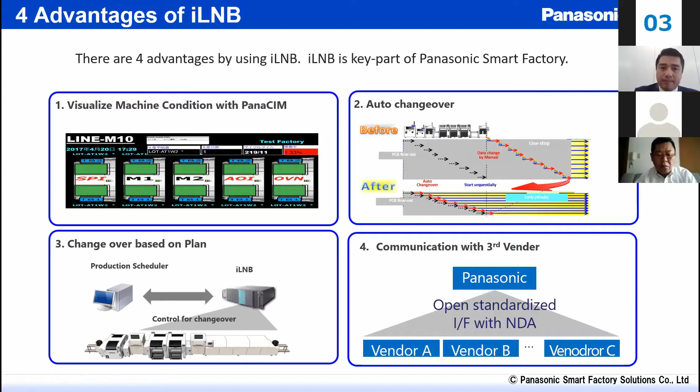I would like to introduce our partners for ILNB. As I explained, ILNB can communicate with third vendor machines. Panasonic already made NDA contracts and developed with these partners for ILNB. If you'd like to add your supplier to the list, please don't hesitate to contact us. We would like to expand our alliance as big as possible.

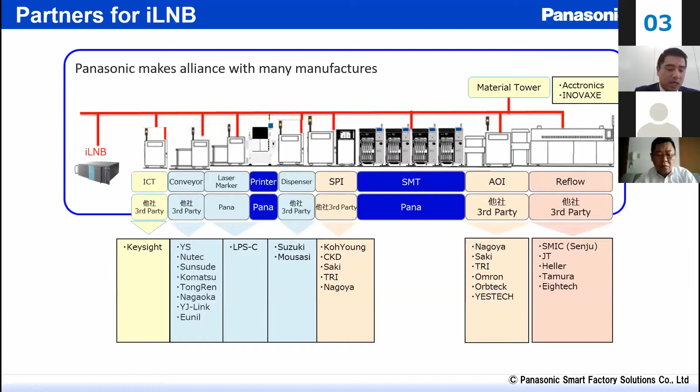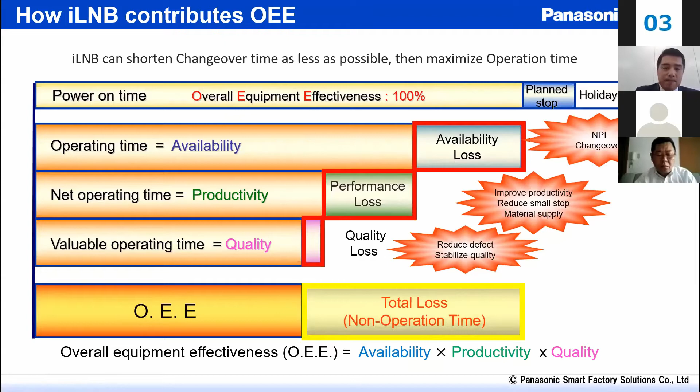In terms of OEE, ILNB can contribute to reducing availability loss. You can extend operation time as long as possible and maximize utilization of SMT by using Panasonic SMT machines with ILNB. Okay, let me move on to NPM-DX.

NPM-DX is the successor of NPMW2. Panasonic developed this machine for any-mix, any-volume customers. The most advantage of WX is its flexibility. Before I explain the details, let me show the general basic specifications. Width and depth are slightly bigger than W2, but CPH, accuracy, and the number of feeders are improved.

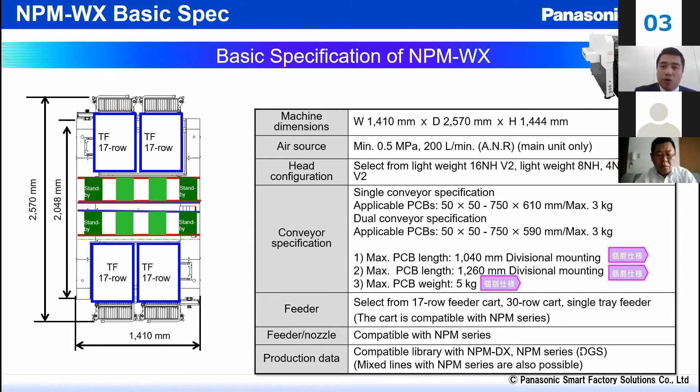Of course, nozzles and feeders are compatible with other NPM series, meaning you can use existing nozzles and feeders for the new NPM-DX. Before the detailed explanation, I would like to share a movie to understand what NPM-DX is more easily.

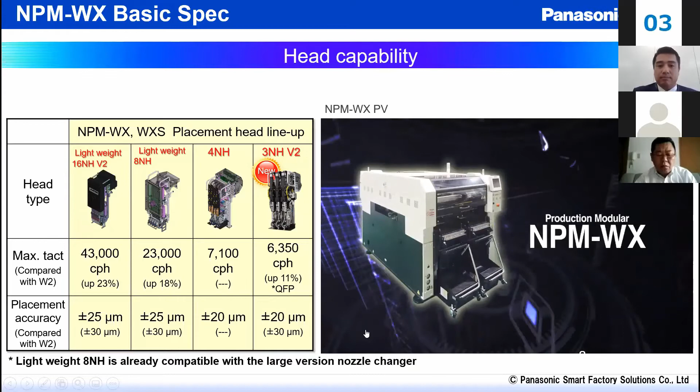Okay, this is the outlook of NPM-DX. NPM-DX is a one-stage, two-head machine, and it can pick and place in two-position placement, like you see in the movie right now.

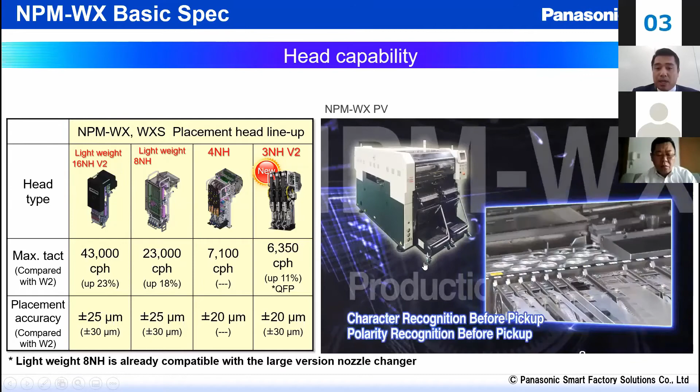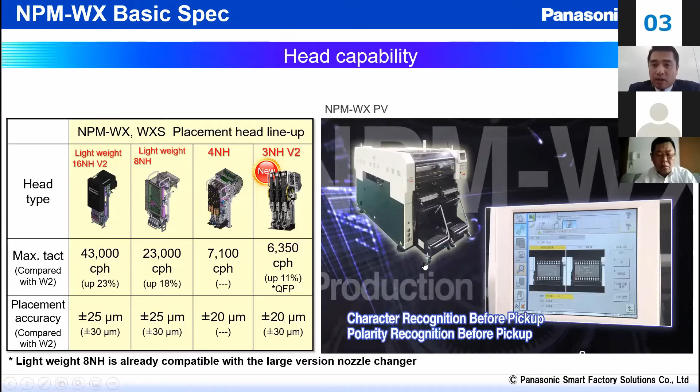NPM-DX is developed for any-mix, any-volume customers. That's why Panasonic enhanced part capability up to 40 mm height, and we can utilize the head camera as well. The machine can recognize polarity and some characters before pickup to prevent easy mistakes.

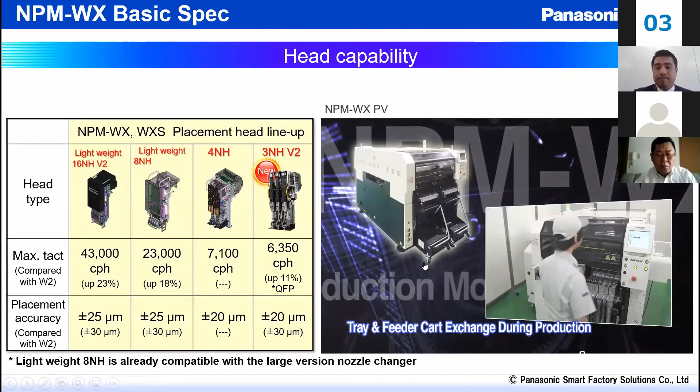One of the advantages of NPM-DX is tray and feeder cart exchange during production. That's why I explain NPM-DX's advantage is its flexibility.

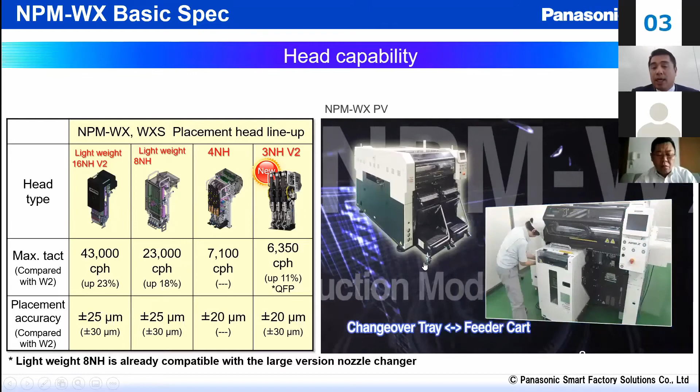Okay, then I will explain the mounting head. The mounting head is a fundamental part of the chip mounter, and it affects productivity deeply. WX uses the V2 head with 16 nozzles here, and a 3-nozzle head, which contributes to CPH and accuracy.

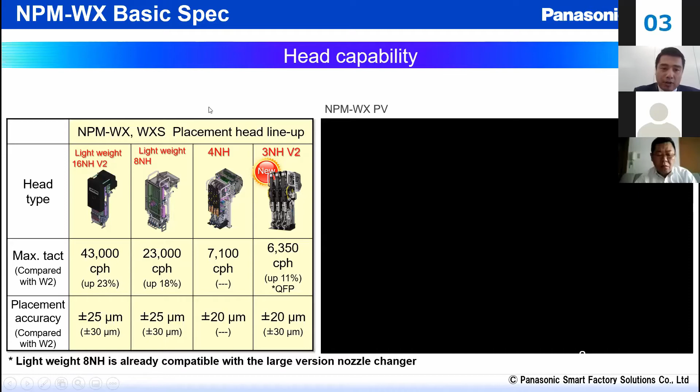And we launch a 4-nozzle head for odd shape components as well. It expands flexibility for odd shape components. Here's the 4-nozzle head. Okay, this is the parts capacity for each head.

Every type of head enlarges its parts capability. The 16-nozzle head enlarges its capacity to 0201 mm components. The 8-nozzle head enlarges to 45 square. And the 3-nozzle head enlarges to 40 mm height as a specialized option. NPM-DX can cover a wider component range than NPMW2.

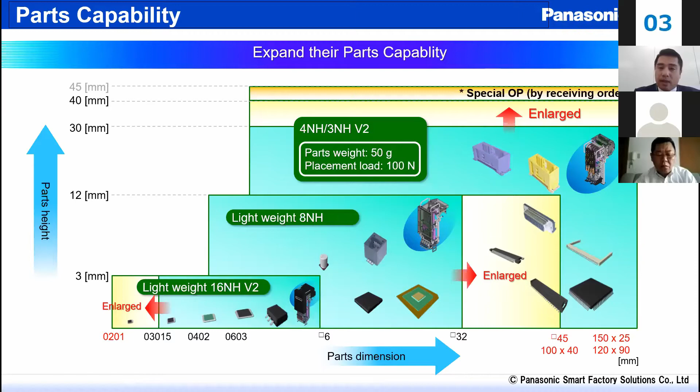Feeder layout is one of the biggest advantages of NPM-DX. NPM-DX can choose three types of supply units. First is the 30-slot feeder cart, which is compatible with W and W2. Second is the 17-slot feeder cart, which is compatible with D3 and DX.

Last is the tray cart, which has improved capacity. The new tray cart can handle 24 parts per tray. As I explained, the layout of the feeder is very flexible. You can choose the 30-slot feeder cart and the 17-slot feeder cart both when you confirm the specification, and you can install the tray feeder cart on the front side as well.

It enhances NPM-DX's flexibility when you consider line configuration.

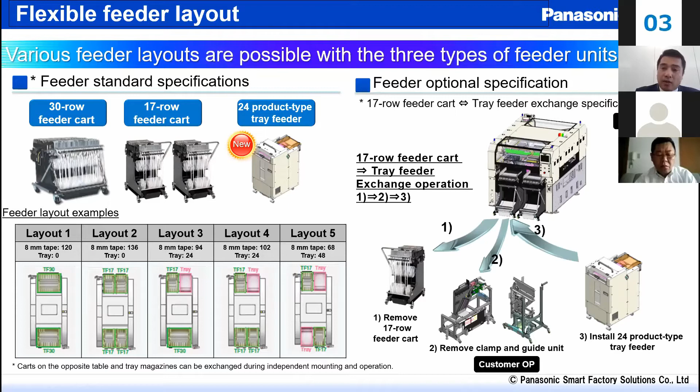NPM series itself has many software features which contribute to OEE maximization, but we don't have much time to explain all here. We would like to pick up 4 licenses which we would like to recommend you the most. I will explain the details of these 4 licenses, which are automatic recovery, remote operation, head diagnosis, and polarity recognition before pickup.

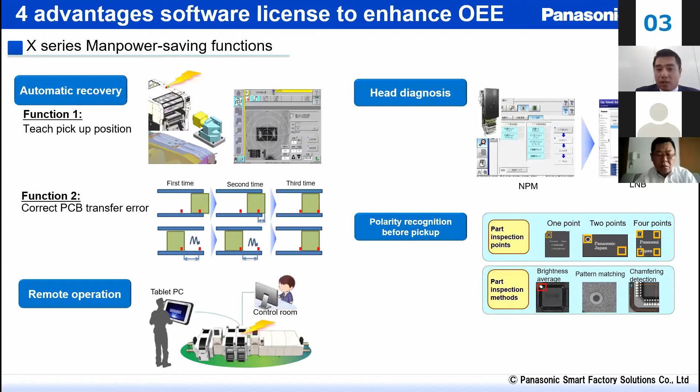First option is automatic recovery. It makes the machine recover when a small error happens without any operation. It affects picking up, recognition, and PCB transfer errors. I would like you to see the movie of how it works actually.

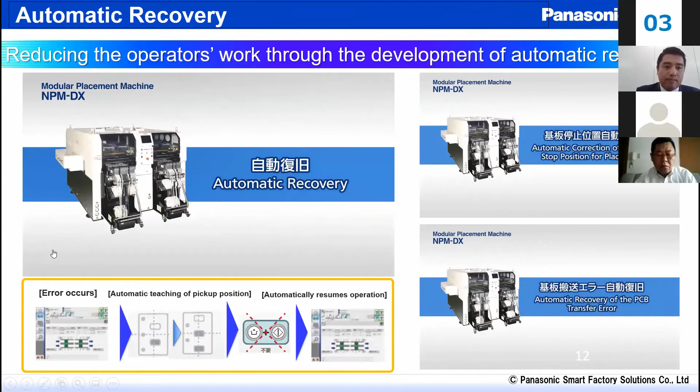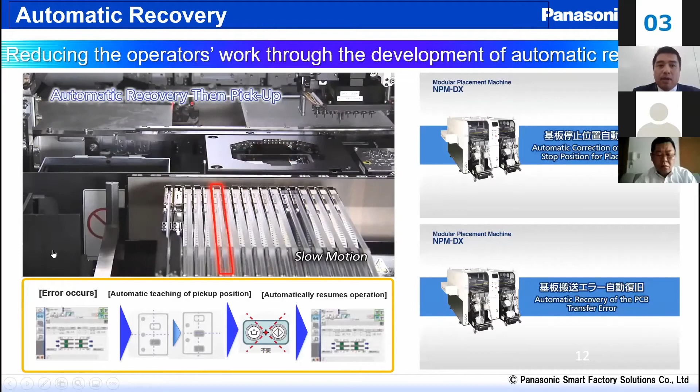This is picking up. A pickup miss occurs in the SMT process. The chip mounter adjusts pickup position automatically, then restarts pick and place.

Next movie is PCB overrun. This is the second time PCB overruns, then NPM-DX adjusts stop position to normalize. We can use this license at our customer - actually we can reduce 50% of stop time waiting for an operator. It improves machine efficiency dramatically.

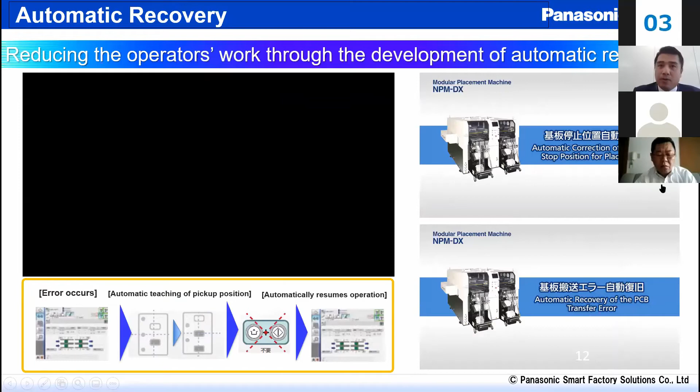Next is remote control. I would like to show the movie on this license as well. When a small error happens, as you can see, we can operate the machine remotely from the management office or by tablet.

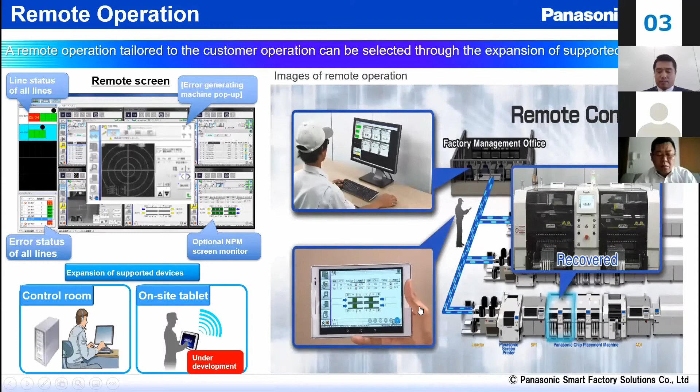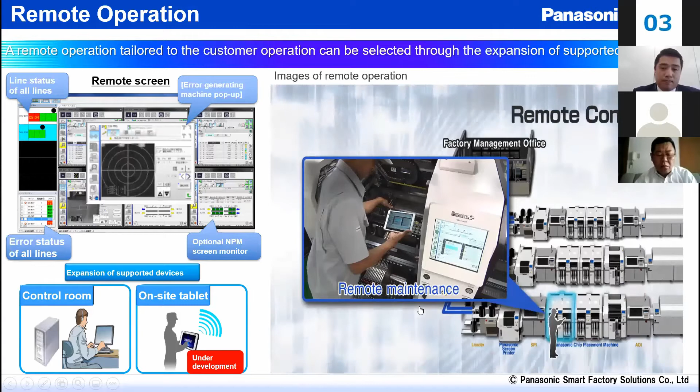There are many types of errors in the SMT process which need just confirmation by an operator. This license can be used for maintenance purposes as well. When you use this license, you can reduce the number of operators in the SMT area, and you can let the operator focus on splicing as well.

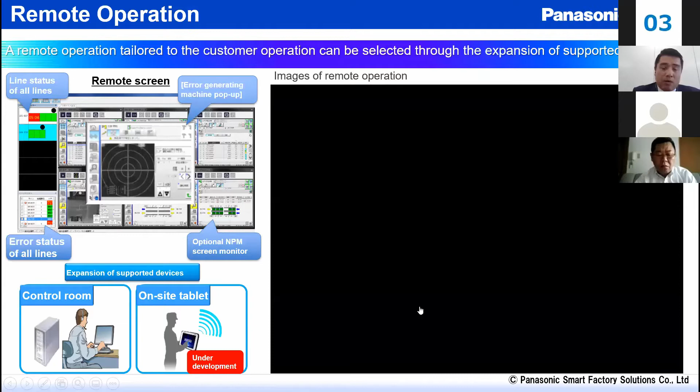Next, we would like to introduce head diagnosis. As you know, the head is a fundamental part for machine stability and requires regular maintenance, but it is very difficult to control the quality. Some customers over-maintain and some under-maintain.

You can find which part is abnormal immediately, and you should replace minimum parts to save cost and time for maintenance. The head diagnosis can check the sensor, air blockage, leakage, and the theta and Z-axis motors both. You can set interval time as well for regular maintenance.

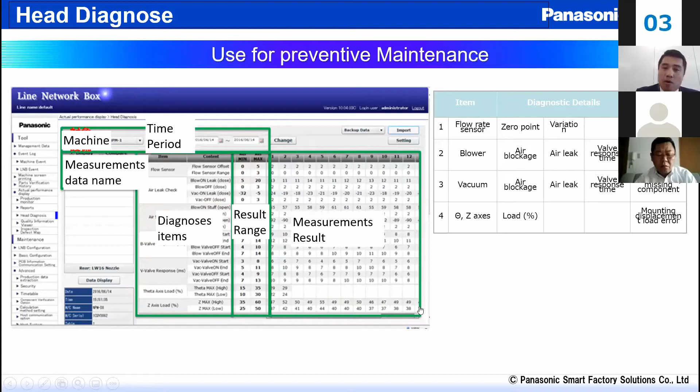The last license I would like to introduce today is polarity recognition before pickup. If you use the material verification function, it is still very difficult to automate preparation for tray components. Operators easily set trays opposite. As a knock-on effect, this license may reduce false NG on the AOI process.

AOI misjudges polarity after the reflow oven due to flux easily, but you can skip polarity check because the chip mounter guarantees it in the mounter process. Let me show the movie here as well.

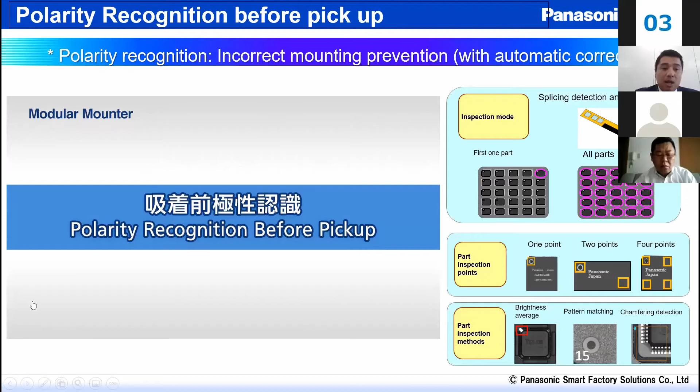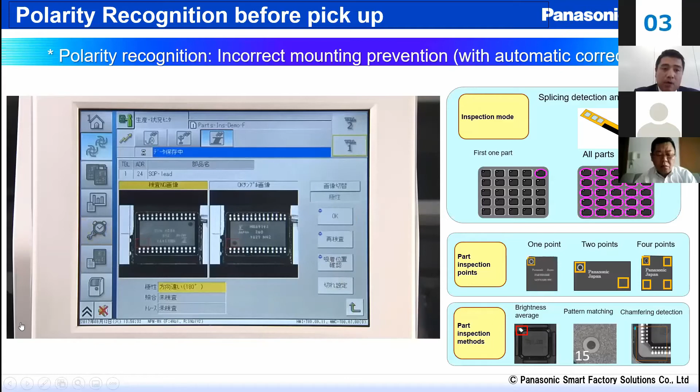The head camera can recognize polarity before pickup. This license can be used for both tray parts and feeder parts. If wrong components or wrong polarity are found, the machine generates an error and calls the operator.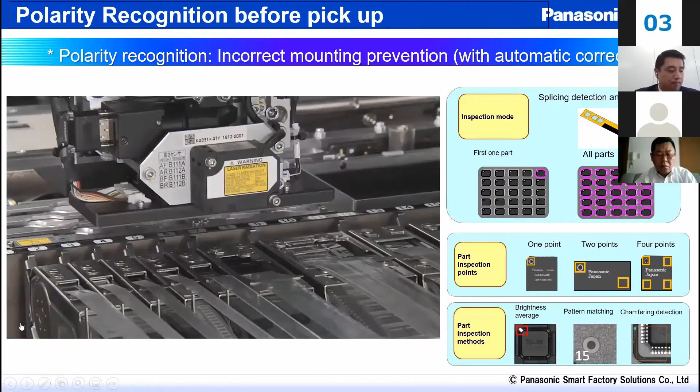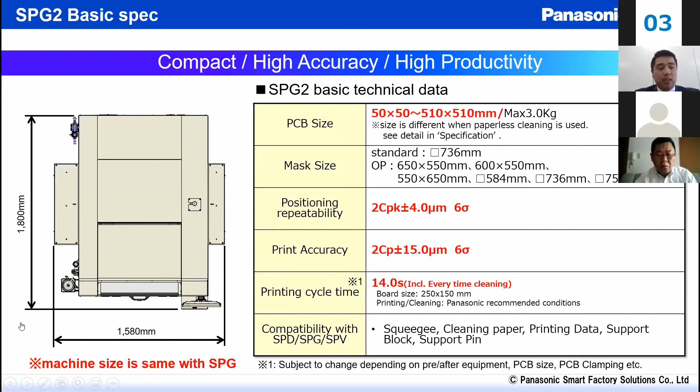Okay, last agenda is SPG2. SPG2 is a new improved model from SPG. Although the footprint is the same as SPG, the basic specification is improved. PCB size is bigger, printing accuracy is more accurate, and cycle time is faster. Main consumption parts are compatible with SPG as well.

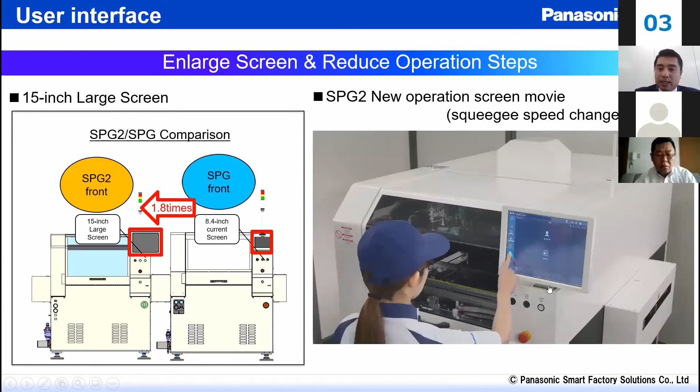Let me explain the improved features. First is the big touch screen. It's a very simple improvement, but it makes operator work very easy. This is the big touch screen, and this is the new operator interface.

The operator is changing the speed of the squeegee here in the movie. I think this interface is very friendly and very useful.

Here are two new functions related to the quality of printing. Panasonic applies a new sensor and a new clamp system from SPG2. You don't need to adjust when you run dark PCB or a slit PCB because the new transmissive sensor is more stable than the existing one. The new clamp system improves stability by reducing stencil and PCB sticking after printing.

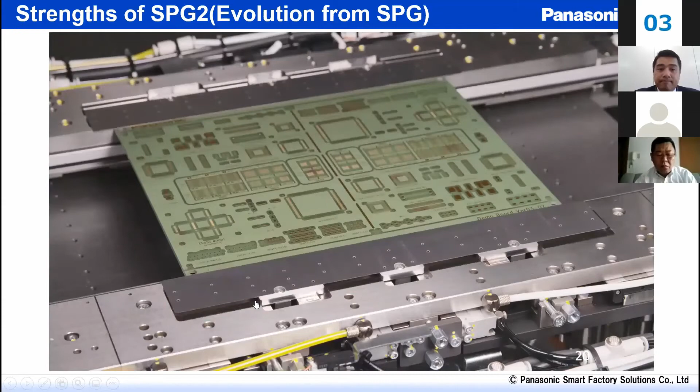Let me show how the new clamp system works. This is the new upper adjustment - it moves and clamps. This prevents sticking between the PCB and the stencil. It affects quality very much.

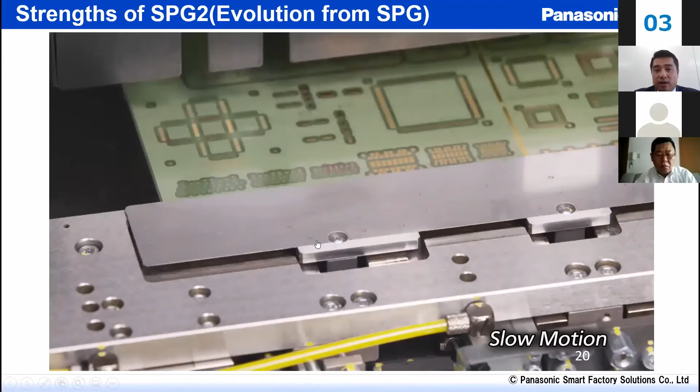This is a new feature relating to printing quality as well. Panasonic applied a changing attack angle for the squeegee. By using this function, we can make filling power and solder volume adjustable. It is very easy for the customer to set up the condition. Let me show how it works actually.

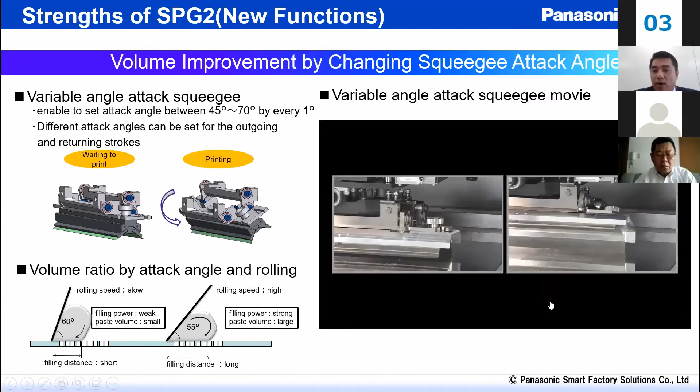From this page, I would like to focus on how you can reduce changeover time with SPG2. I'll get straight to the point: you can reduce changeover time by more than 10 minutes. This solution consists of automatic changeover of support pin, solder paste, and stencil mask.

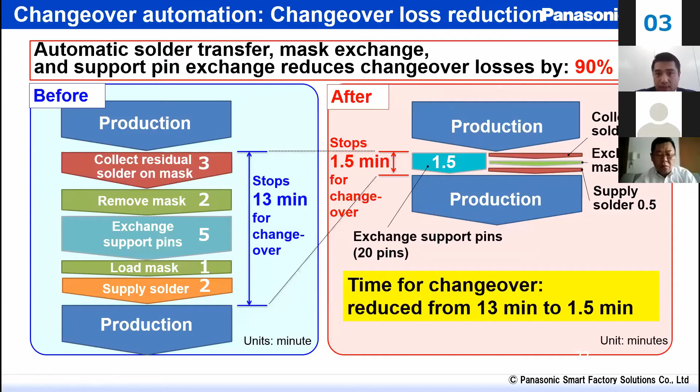Firstly, we would like to explain support pin automatic replacement. We can pick and place the unit on the recognition unit. It can reduce changeover time and prevent mistakes which break the PCB board. Please see the movie to see how the function works.

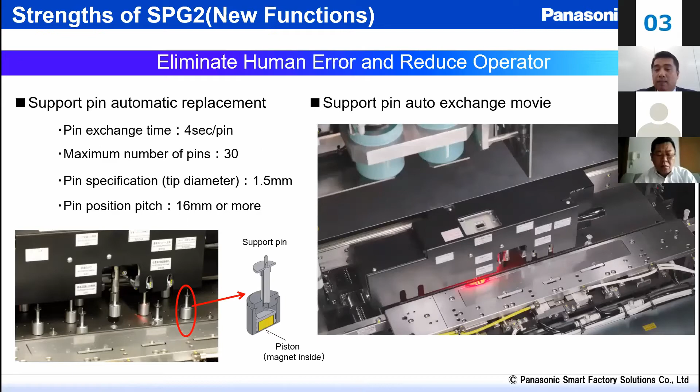This is the support pin. The support pin includes a magnet inside. Then it's picked and placed by the recognition unit. After placement, the unit recognizes the position. So that's why you can save time and prevent mistakes by the operator, both.

Secondly, we will show the automatic changeover for stencil mask using a frameless mask and AGV unit. This is still a conceptual proposal, but Panasonic has already finished basic development for this function, and I think some customers already saw this function at the FSC.

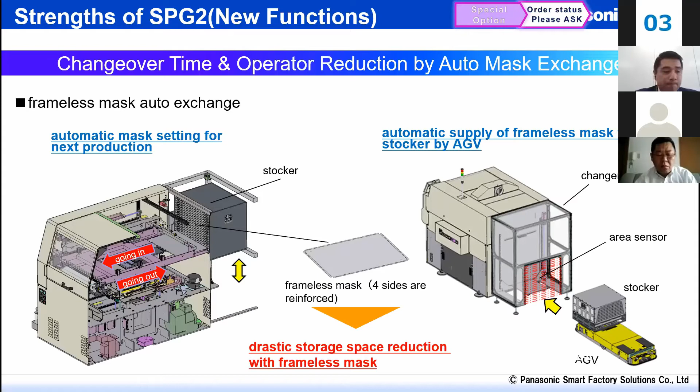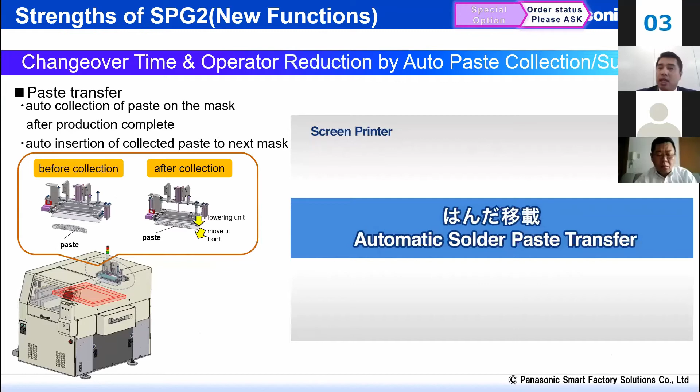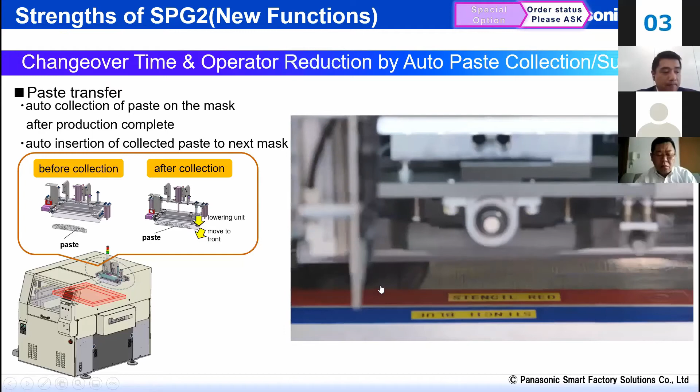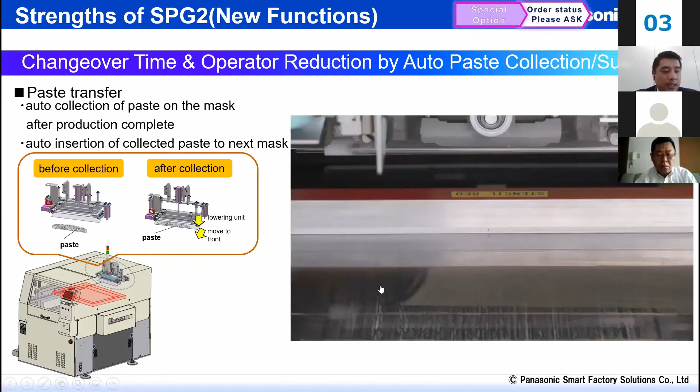Last for the changeover, I would like to introduce the automatic solder paste transfer function. It's easy for you to see in the movie. Firstly, it collects solder paste from the old stencil like this, and replaces the stencil from the back side. Then after adjusting the new stencil position, it supplies solder paste onto the new stencil.

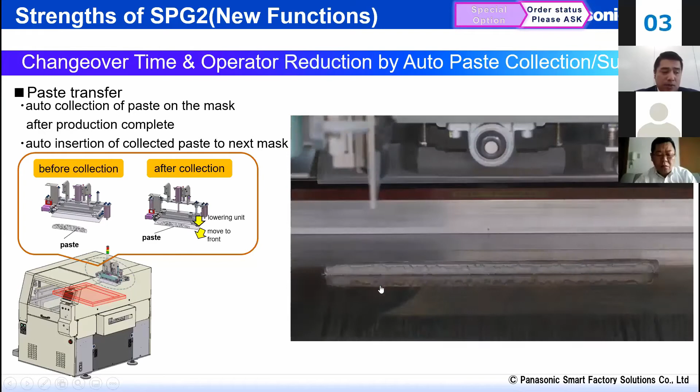In addition to reducing changeover time, it can keep the atmosphere inside the SPG2 stable. I think it affects the quality as well.

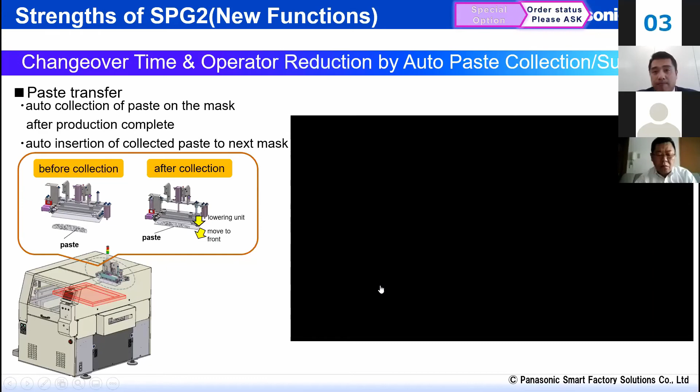The final function we propose is paperless stencil cleaning. As you know, cleaning paper is a big portion of consumption parts in the SMT process, and it becomes a reason for contamination. If you can change to paperless cleaning, it will affect both quality and cost.

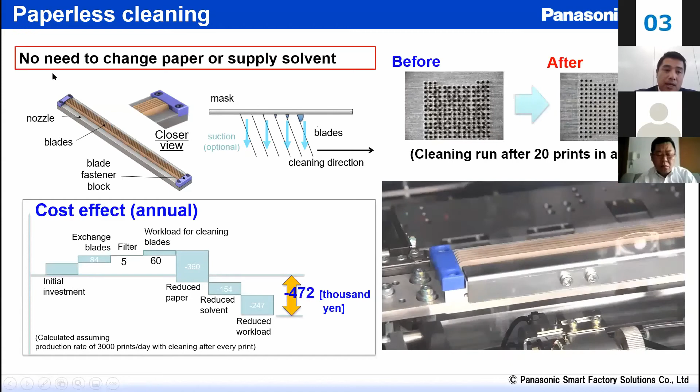There are 6 plastic blades, then they remove the solder paste from the stencil.

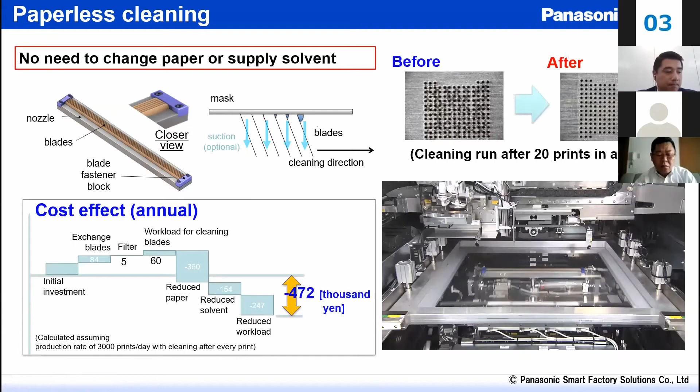Okay, this is my presentation for the Panasonic new features. Thank you for listening to my presentation again. Thank you very much.

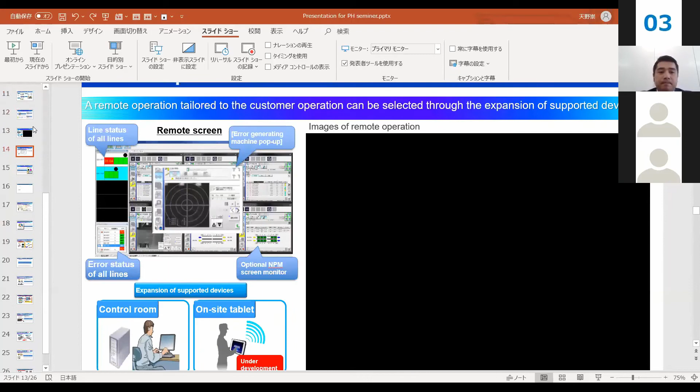Amano-san, okay. Yes, polarity check. Sorry, the customer's question is what's the impact on cycle time? Cycle time depends on the mark or some character, but...

Okay, I'm Iwai from Panasonic, I'll reply to your question. So of course it depends on the mark condition, but one component takes 1 second. But I think it only uses the first component check because all component direction is normally the same. In this case, this doesn't affect production so much, I mean only 1 second per reel or per tray.

Meaning during the first pickup, for example under the tray, the machine will check and assume everything is okay, right? Yes, you can select this kind of machine operation in the program - all component check or first component check. This you can select.

So if we choose the all component check option, say in one tray there are almost 100 parts, 100 ICs, so it's already equivalent to 100 seconds additional. Yes, you are right. Okay, so still have some big impact. Yes.

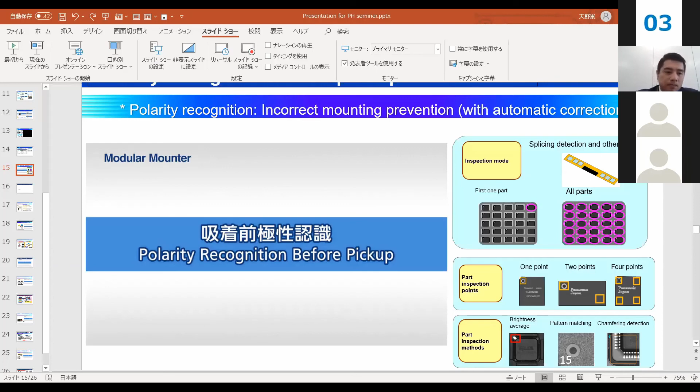Okay, and I recommend the blade, cleaning nozzle, and blade. That one also needs to be taken out, and outside needs maintenance and cleaning. I think it's better to buy 2 units. Recommendation is to buy two cleaning units, yes, the blade.

Then another question is, what is the maintenance for this paperless cleaning unit? This unit you can take out from the machine and do it offline, some wet cleaning, and this blade you can remove one by one and clean like that. We have a cleaning demo video, so later we can show it, but sorry, it's not prepared today.

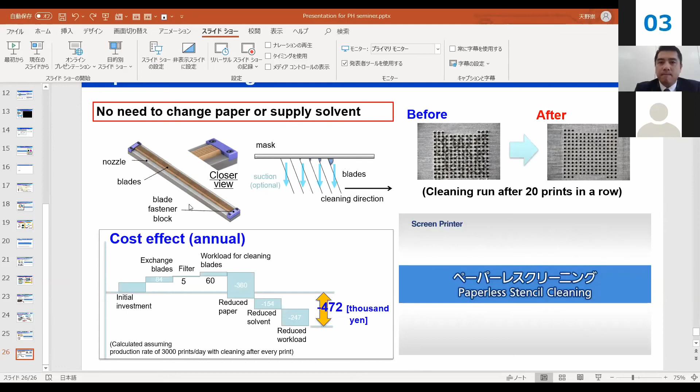Thank you, Dave. So next question for NPMWX, Amano-san: is it switchable to set up feeder cart and tray feeder, vice versa? Meaning, can a customer set up a machine in a tray setup, then in future convert it to feeder, removing the tray and exchanging it with a feeder cart? Yes. Can it be done on the customer side or from the factory? Customer side. Okay, thank you.